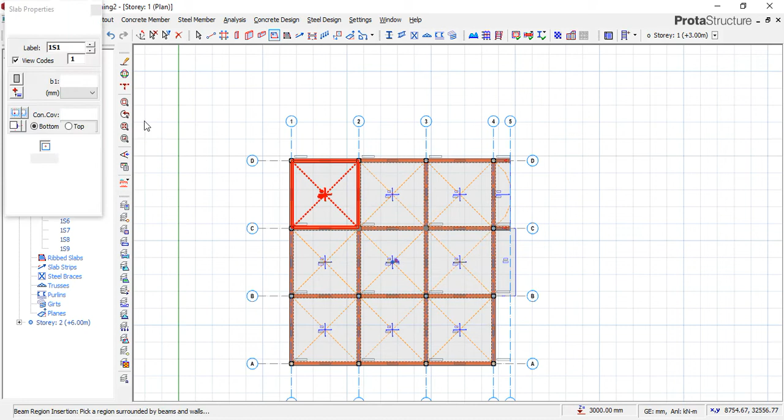I really appreciate that. So what you can do, two ways. If your slab, majorly your slab, this is where you go to. You see general and you see load. If this does not give you, let's assume this is 0. If you click here and it's not giving you any number at all, if you right click inside this imposed load and this is not coming out, you change this, it's not giving you the additional dead load, and this self weight is not giving you self weight when you click on load, then I think the program has an issue.

You need to uninstall and reinstall it. But if you want to input it manually, what you do is this, and how the procedure is.

If you look at your load on slab, you have your self weight. If the thickness of the slab is 150, you convert it to meter, because this thing is in millimeter. Convert it to meter, which is 0.15 meter times the specific weight of concrete, which is 24 according to British standard, 24 kilonewton per meter cube. If you multiply, you get 3.6 kilonewton per meter squared. If you go to your Prota, the self weight, this is the self weight of 150 thick slab. It has already done this for us.

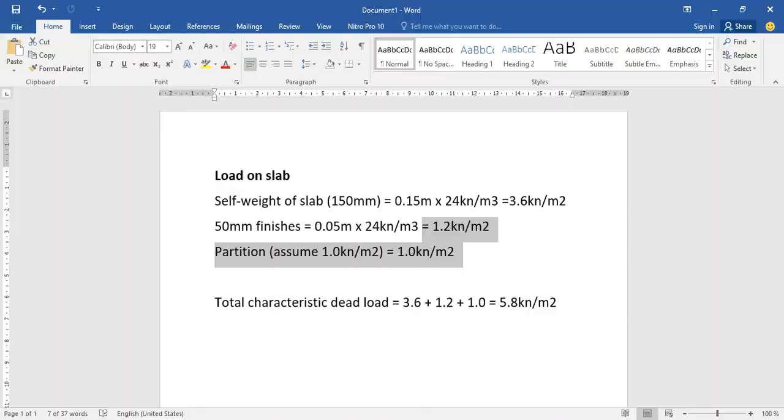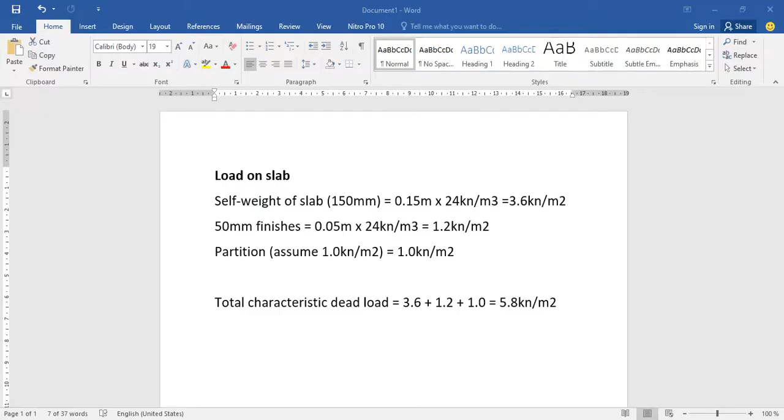1.0. So if you come to this part, if you must do it manually, put enter number, do 2.2. If you right click and it doesn't give you this, check, you just Google impose load on buildings, it will pop. If it's a domestic use, for domestic use, residential use, the self weight, the imposed load, the live load is 1.5, but depending on what the use will be.

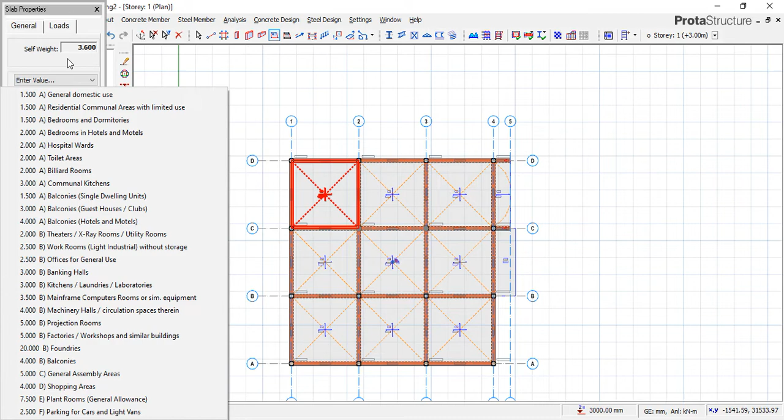So check your Google. If I browse and I see the self weight and the imposed loads, I will put it on the Google sheet so that you can download from the description. But before I do that, you can check on your Google and see the different weights and know the use of that building. And that is it, Budaba. I hope this explains it. But if you are still having issues that you can't get, even when you right click on the imposed load, then uninstall and reinstall your program so that this problem can be solved.

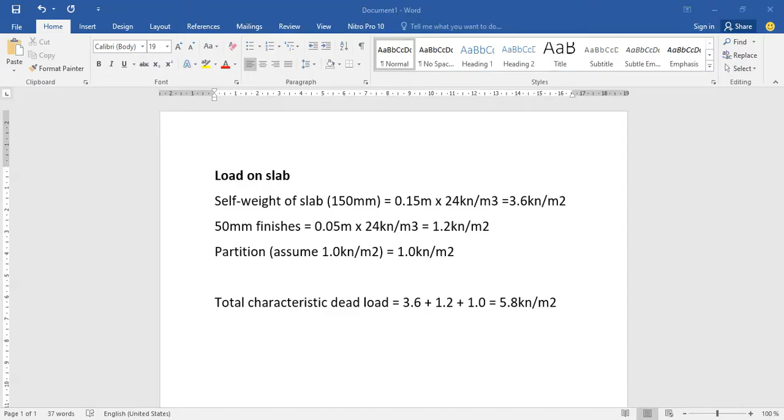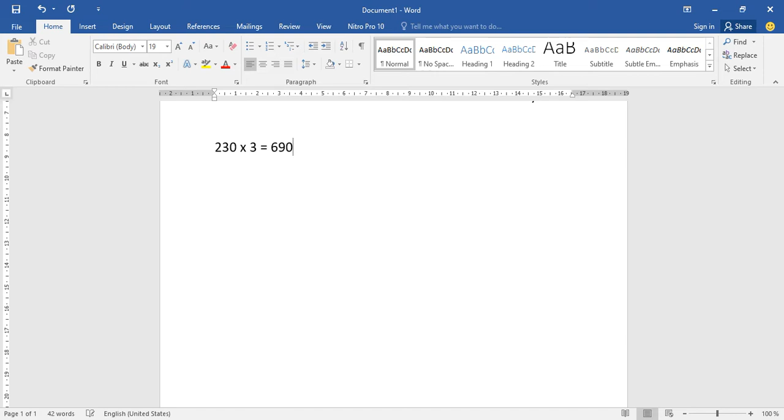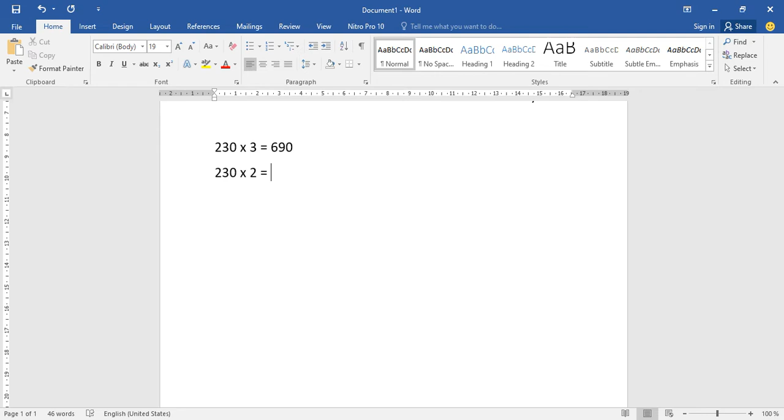So majorly, if we are creating a strip foundation, if your block work is 230, that is the width of your block work. For the strip foundation, it becomes the width of your block multiplied by 3, which gives us 690. Or some people may use a different approach, depending on your country and how you go about it, to determine the width of your strip.

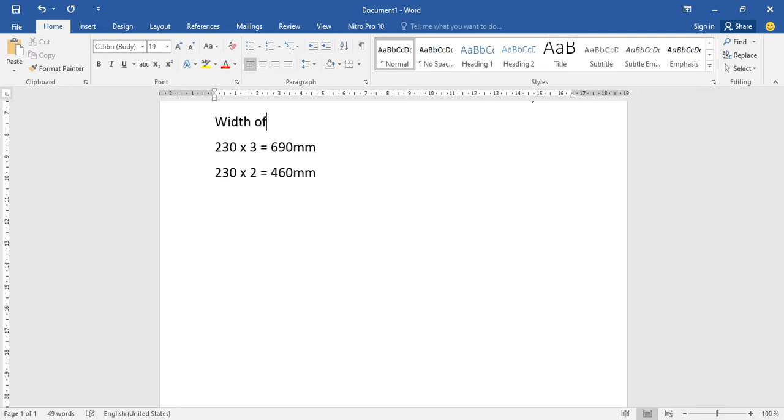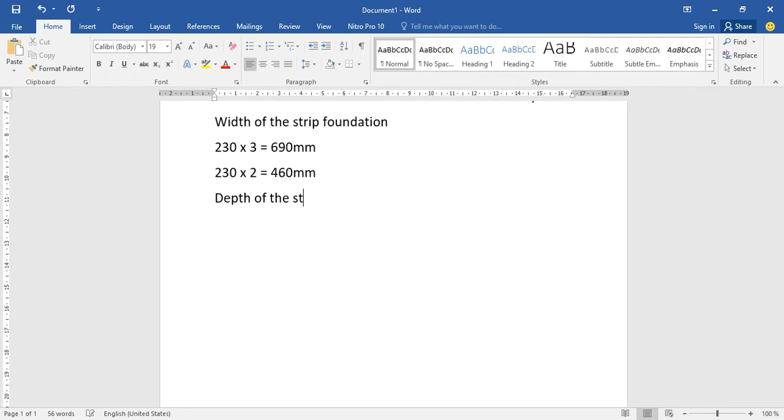This becomes the width of your strip, the width of the strip foundation. Then the depth of the foundation, the depth of the strip foundation.

Most times for the strip, the depth, we assume the thickness of the block. Most times, if you are not reinforcing the strip, we use the width of the block. Whatever is the width of the block, the thickness of the block becomes the thickness of the strip where the block wall will be laid on.

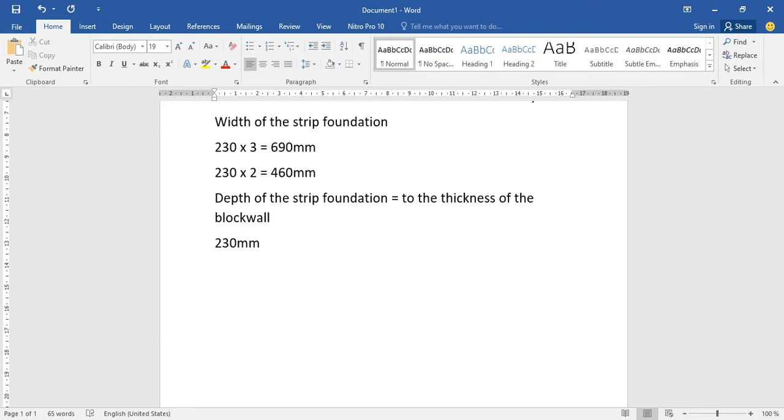Yeah, so it all depends on your country and the thickness of the block used. Some countries use tiles or bricks, so the thickness of those bricks will determine the thickness of the strip foundation.

But listen, if you are not using it as the main foundation, when you do strip you still have to put a pad on the column, so the strip foundation is not really the thing carrying the loads of the building, but the column and the pad. But if you are using it as the main foundation to carry the load, then it has to be reinforced.

Depending on the area, averagely what we use for the thickness of the footings, the minimum thickness of pad foundation, depending on your location, please confirm what the thickness is in your own country. You can chat me up and let me know what the minimum you use is. So for the pad, it will be 350 minimum for a single floor.

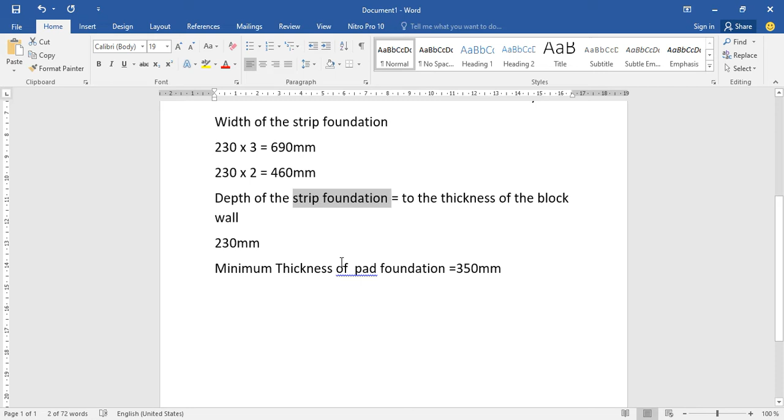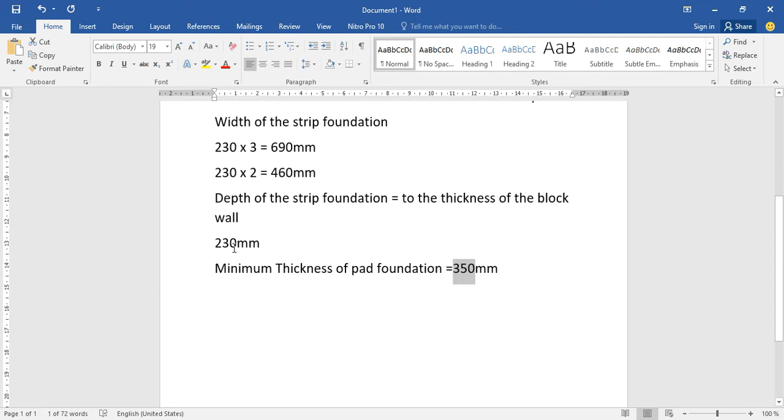Anything less than that is not advisable because of punching, but you can calculate and check for punching; to be safe we use 350. So for your strip, if it must be the main foundation carrying your load, we have to make this depth either equal to the pad depth or greater. So with this, let's move back to ProtaStructure.

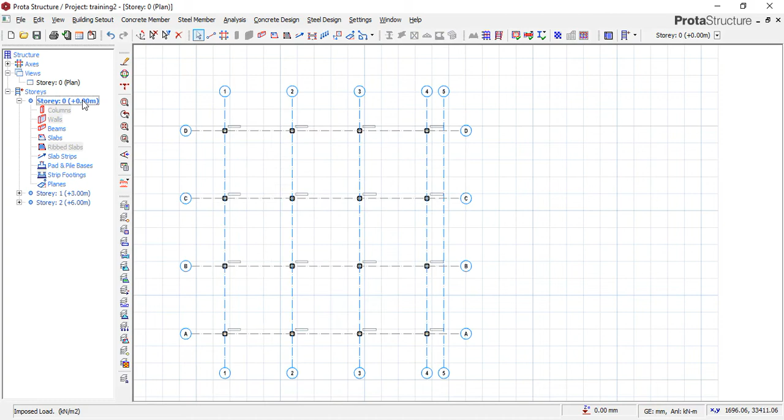So we are here. We want to create strip foundation on this area, here. We can create here, we can create here, or everywhere. Well, but we'll just create here only, and with this you can create others. Click on your beam. Please pay attention.

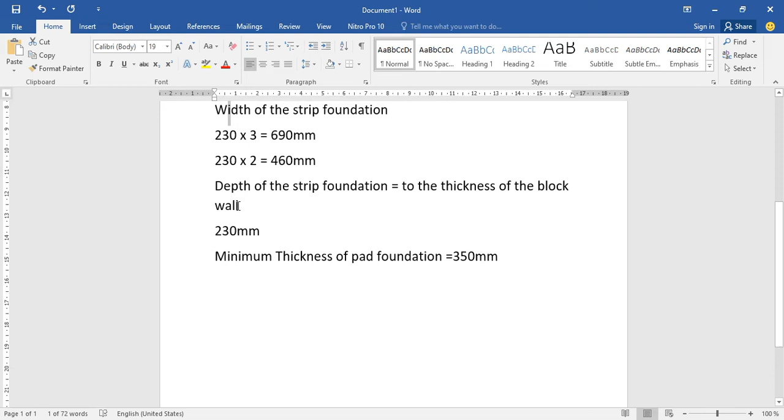We've already said the width of our foundation is 690. That is the width of the foundation.

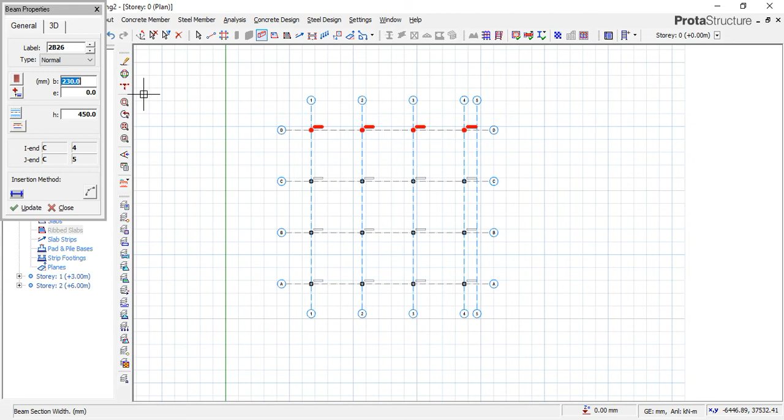So we'll put two things. Let me explain something here. For this, we can do a tie beam here. No, not this. We can do a tie beam.

Please pay attention to the end. If you don't pay attention, you will miss out something.

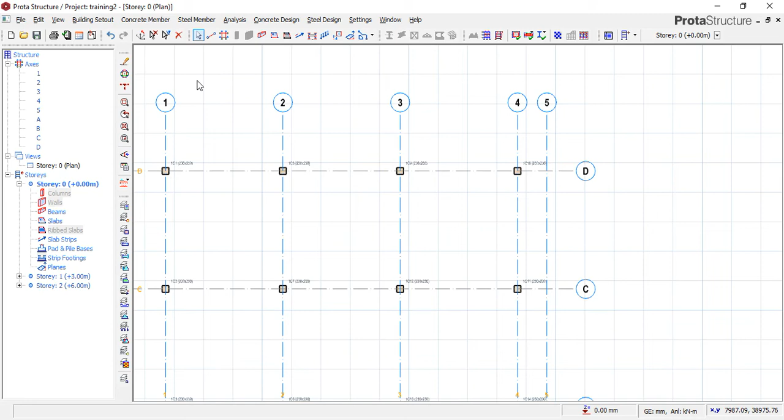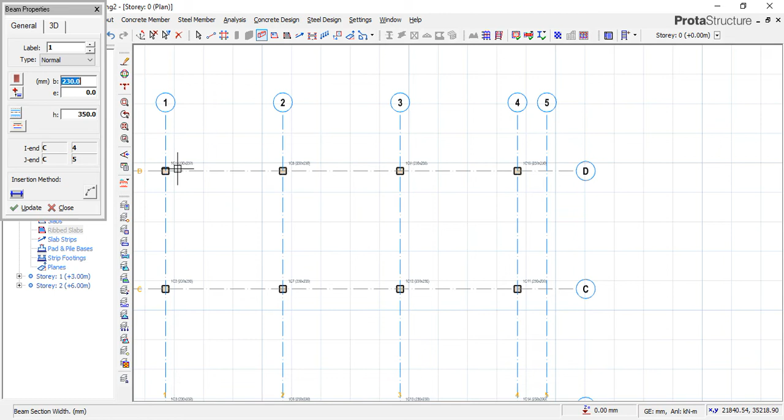So this, you click your beam. We've said the minimum thickness of the strip would be this. But for what we are doing, we are using a tie beam here. You create a tie beam first there.

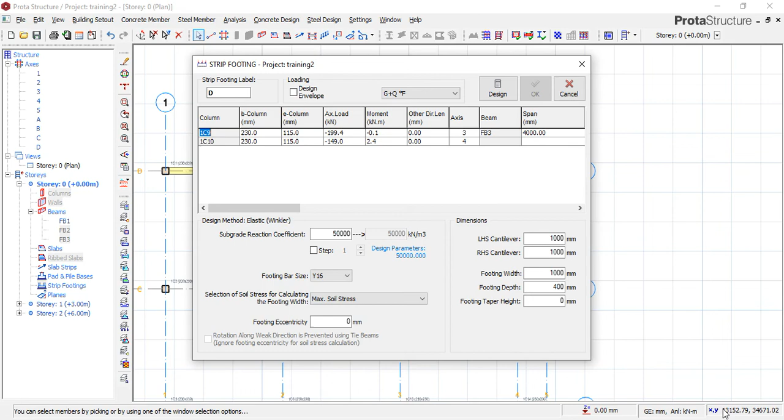Once you've done that, right click. When you right click, click on insert pad. Okay, once you click, okay, so we click on this. We say 230 by 350.

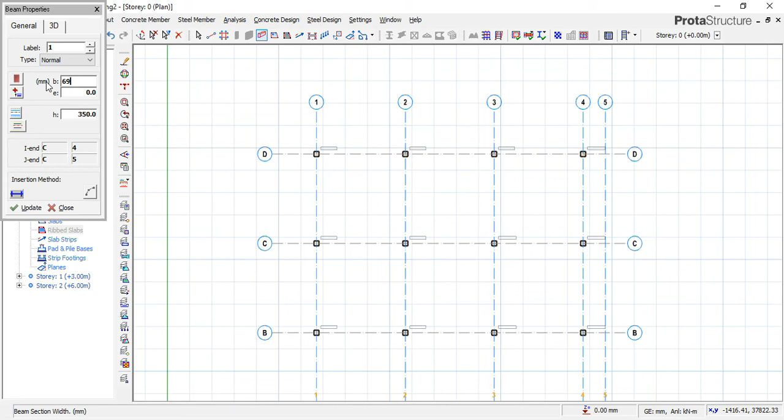No, not. Do 690. Let's do 690. 690. Yeah. 690. Okay, once you've done that, you've created the beam.

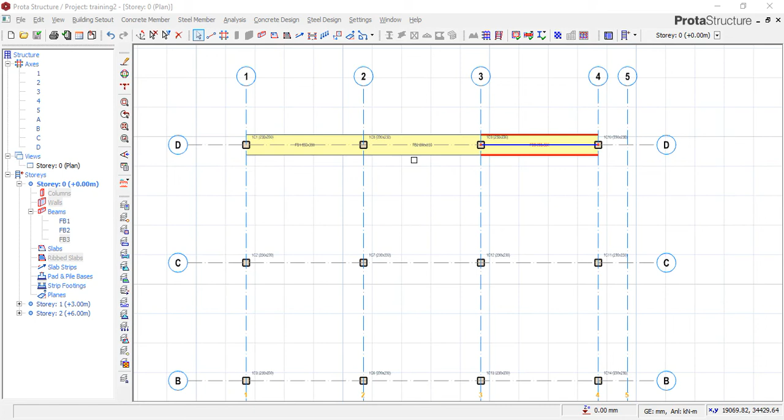But for our, you right click. Depending if you are creating your strip all through here, it's advisable that you highlight all of them. Right click, then right click.

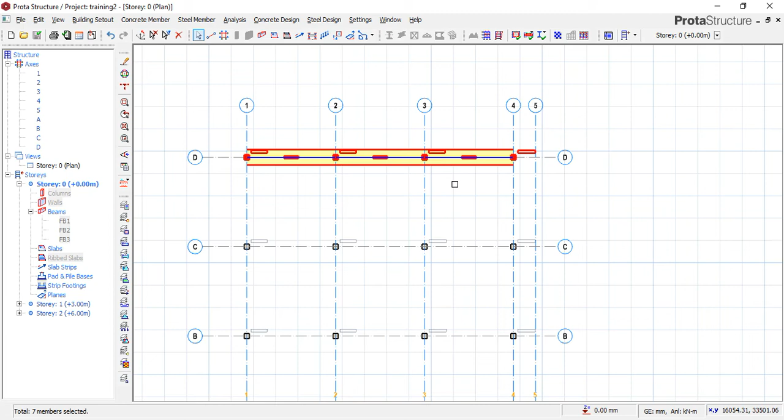Okay, please pay attention. This is a bit tricky, but just pay attention. If you highlight all of them, you won't get it. So click one of them, hold down your control key, click, then right click, then insert strip footing. You can either do it one after the other, insert, but it's not advisable.

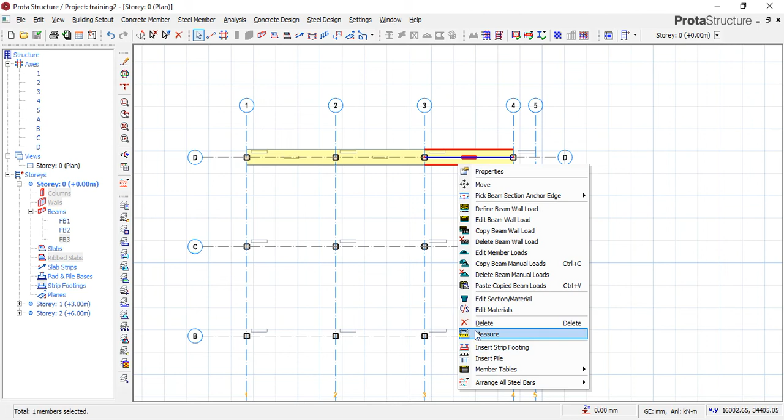If you are doing all, you have to click control, hold down. Then if you hold down your control, it shows positive and negative, meaning if you've selected and you hold down your control key, if you click again, it means you are removing. But if you click and hold down, it adds to it.

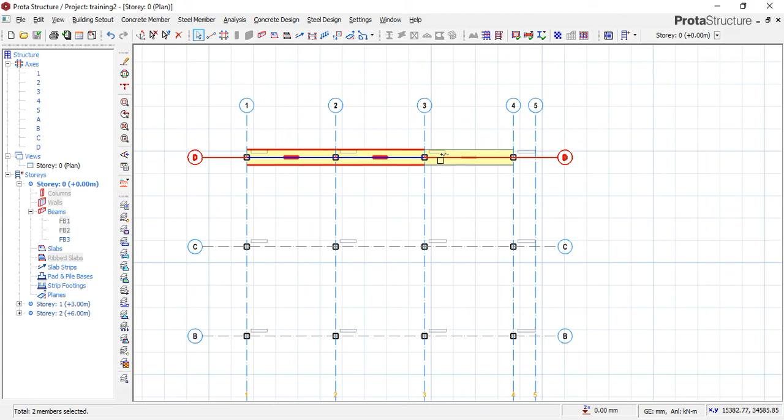Right click and insert strip footing. Here you can, if you have your soil test report, you can input the exact soil subgrade reaction coefficient here, but if not, just use the default settings.

This will give you, please check how we created this footing size. That's when we've done it before. Please check our previous video.

Then this part, right hand side cantilever, left hand side cantilever, the both side what you want the cantilever to be, but normally we cantilever either 450 or 230, depending on what you want to do. But if you leave it like this, it will cantilever 1 meter.

Then the width, footing width, we are using 690. The depth, we are using 350. Are we tapering it? No. Is the footing eccentric? No. Let's just leave everything at 0.

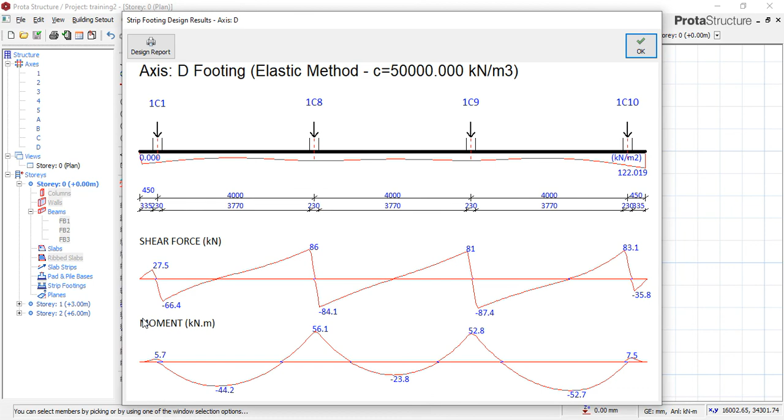So close this and you say okay. So if you see it, it has created this. What you do now is to go to concrete design, go to beam reinforcement design, come to foundation detail. You see the beam, the foundation beam.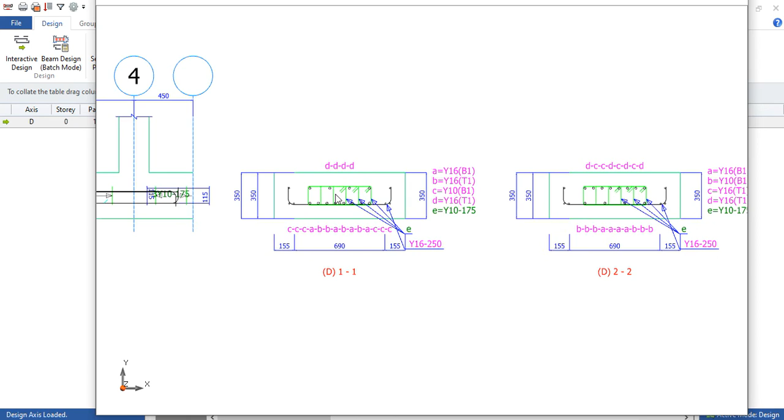Click on interactive design. Once you click on it, this will pop up. So this becomes the reinforcement for your strip. So if you come to detail drawing, click on detail drawing, it will show you your work. This is the reinforcement for your work.

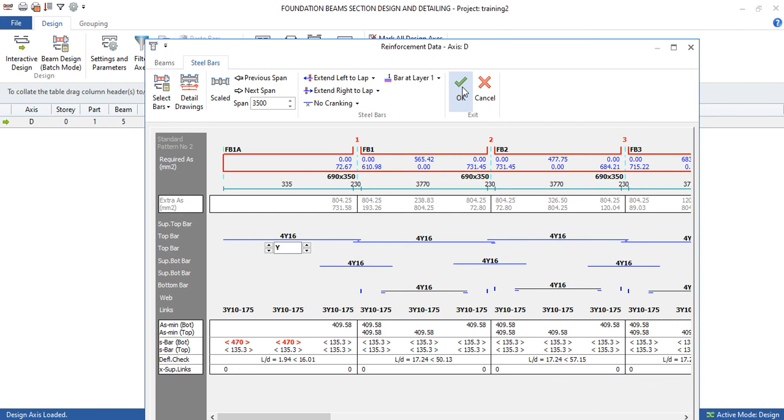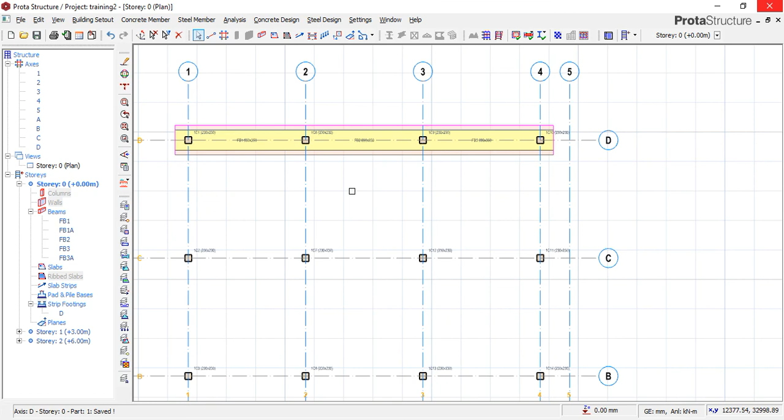So this is it. This is how you design for your strip foundation. This is how. So you can play, keep trying, keep playing with it. And also, similar thing you can do both ways and crossways and every other way. So this is how you design for your strip.

So Neo from South Africa, I hope this answers your question. But if you still have any other question, please let us know.